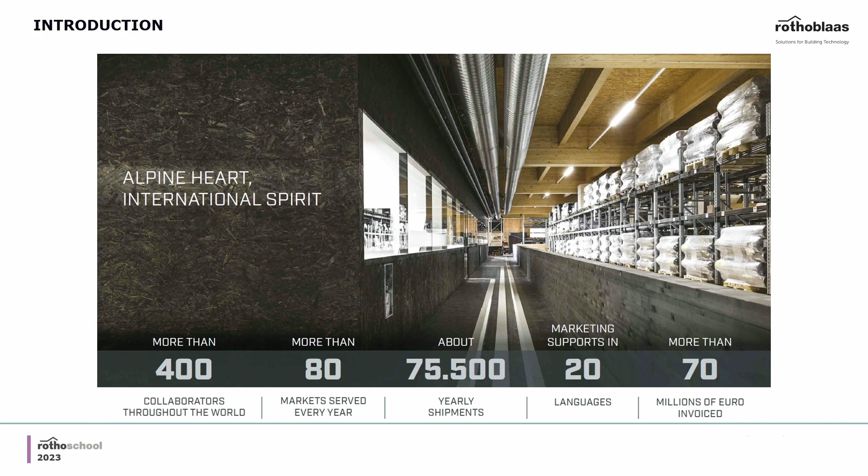This is why we have an alpine heart but an international spirit, because we are located right in the middle of the Dolomites, but we are as well present and located all over the world with our subsidiaries. We are more than 400 workers in Rothoblaas at the moment. Actually, we are almost 500 as we speak, because we keep on growing and growing.

As you can see here, but we're going to discuss more in detail also in the video lessons, this particular mass timber structure here, we just recently finished the construction of this massive and very nice automatic mass timber warehouse that we have here in our headquarters of Rothoblaas. And this has already doubled the existing warehouse space that we have in Rothoblaas.

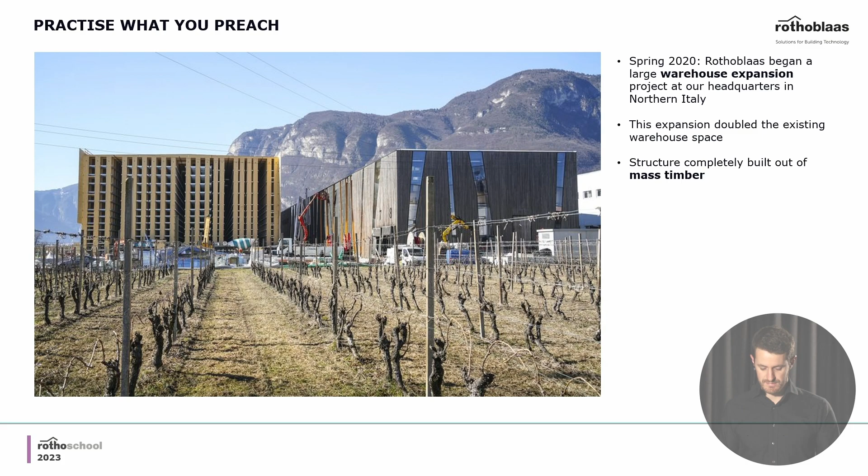So for us, it's practice what you preach. We preach with our Rotho schools around the world to use timber, and also for our own project, we use timber. The use of wood and of timber structure, of course, for us is very important from, as you all know, a sustainability point of view, very, very important. And this is why we preach also the use of this kind of structural material.

But of course, as you all know, timber is a material that a lot of people are passionate about, and myself, I'm the first one to be passionate about it. And second of all, it has a lot of very, very good structural characteristics that we'll see throughout the video lessons. And this is why a lot of people love timber, not only because of its beauty, but also because of sustainability and great performance, really.

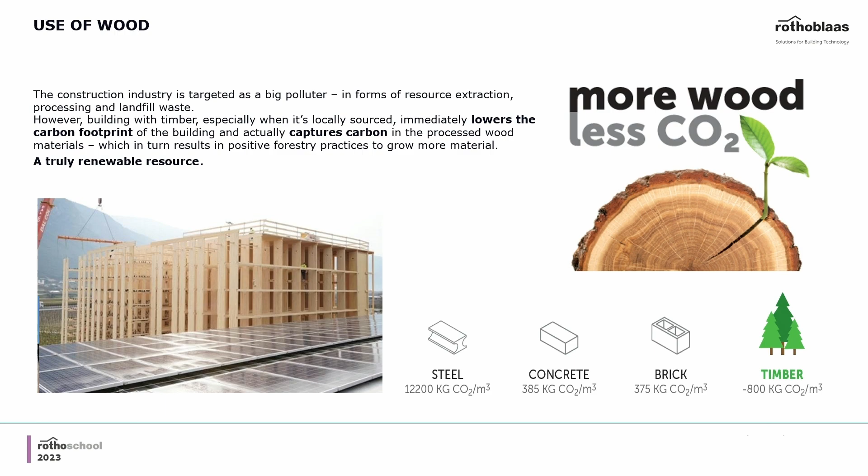What are these video lessons that we're going to do this year? There are 9 of them, actually. We start with the potential of CLT and mass timber.

Then we'll go for durability of timber structure and corrosion resistance for outdoor solutions, waterproofing and airtightness of timber structures, the acoustic in timber constructions, the fire design in timber structures, the seismic design, the composite structure or hybrid structure, a very hot topic nowadays to optimize the use of timber, the innovative connections for timber structures, and last but not least, the installation of fall arrest system.

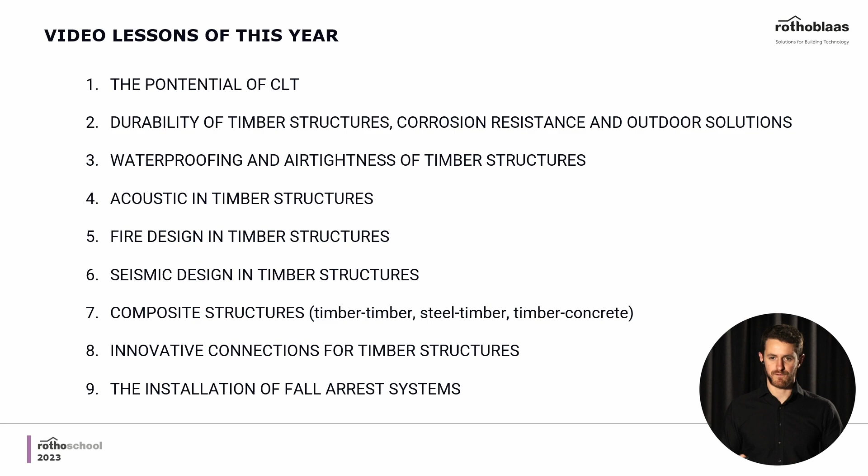Hello everybody, in the lesson of today we are going to have a look at the fire resistance of the timber structure, as you can see here. So a lot of people, as you can see in the image, have the fear that timber and wood in general is a combustible material, and therefore the resistance in the fire case is not going to be good. Actually, as we will see in the presentation of today, it's exactly the other way around.

But why are people so scared about the fire case?

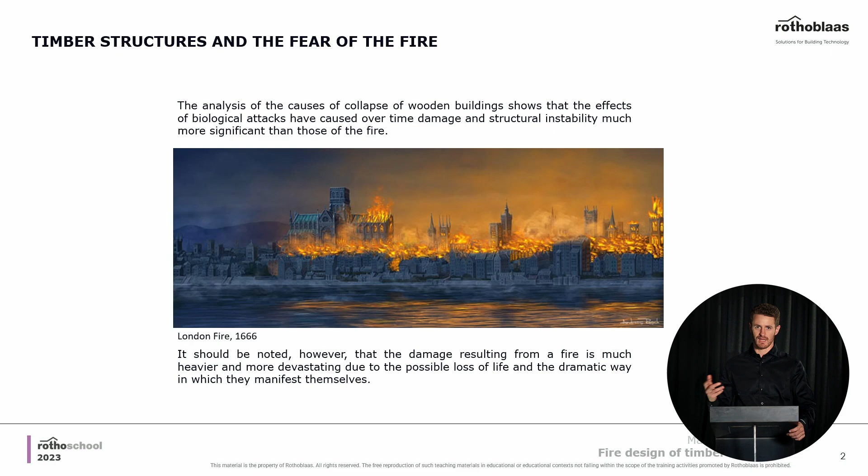As you can see in the image, the effects of fire on cities and buildings in general are devastating, and this is why these images are stuck in people's minds. What we are trying to do with this lesson is explain why it is actually the other way around. I've made this graph for you to more deeply understand the phenomenon.

Here you can see that the main causes of issues in timber buildings are design issues, for instance, when the timber building is not designed in the proper way. This is why we teach this at the school, because it's very important to build correctly with timber structures. It's strictly connected with design issues, also durability issues, since timber has to be designed properly so it remains durable throughout the years. Connections are also very important to design correctly, because they are the most fragile part of the timber structure if not designed properly.

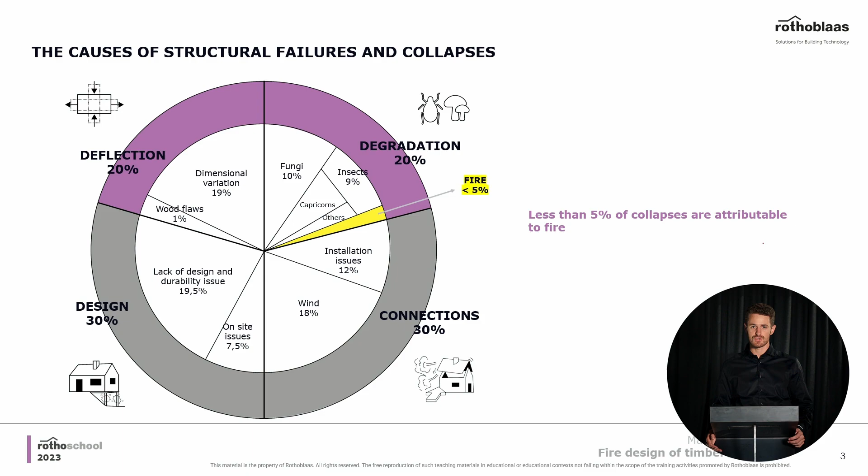Therefore, you can see that only 5% of the overall issues are caused by fire. So we shouldn't be so worried about fire in timber structures. Actually, sometimes it's more of an issue with another type of structure, for example steel, just to give you an example.

So you can see here what happens when a timber structure catches fire and the fire is then extinguished. You can see that the connection is partially exposed, but the timber structure is still standing, so it hasn't collapsed. This means, first of all, that we have a lot of safety factors in our design, which we'll see throughout today's short lesson. This also shows that the structure itself has a lot of resistance to fire. Of course it has fully charred, it has burned completely, but this doesn't mean it has collapsed.

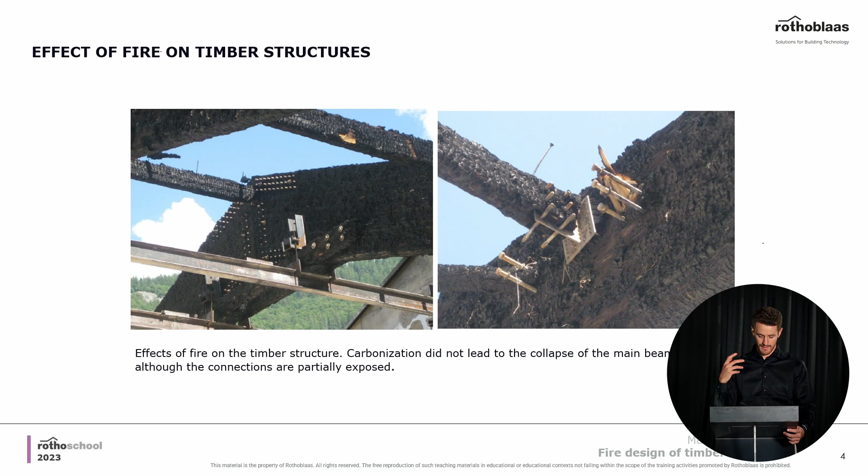What has collapsed, though, and it's very clear in this image, are all the secondary structures, for example the purlins in this case, or the timber boards finishing the roof. So one piece of advice is that it's very important to design the structure for the right fire resistance, but at the same time you should also be careful studying the secondary elements in your structure, so you don't risk them collapsing on the people inside the building.

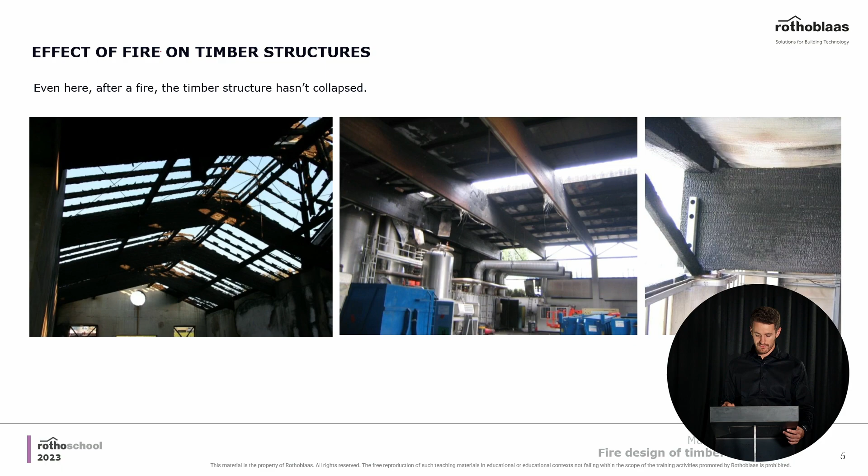Other pictures here of the main structure show that the primary beams, and also the secondary beams here, are still standing without any issues, although everything has completely burned. But again, keeping in mind the pictures we've just seen of the burnt structure, you've seen that it's all charred and the section of the timber beams is very much reduced. So why is it still standing?

This is the first question we could ask ourselves, and the first answer is right here in front of us. First of all, in the fire load case, we consider lighter weights, a different loading which is lighter than the one we consider for ultimate limit states. And why is that?

First of all, you can see one example is the snow case, the live load of the snow. Since we have a fire burning inside the building, the heat melts the snow, and therefore the snow is not there anymore. So in the real case scenario, we can consider a lighter load.

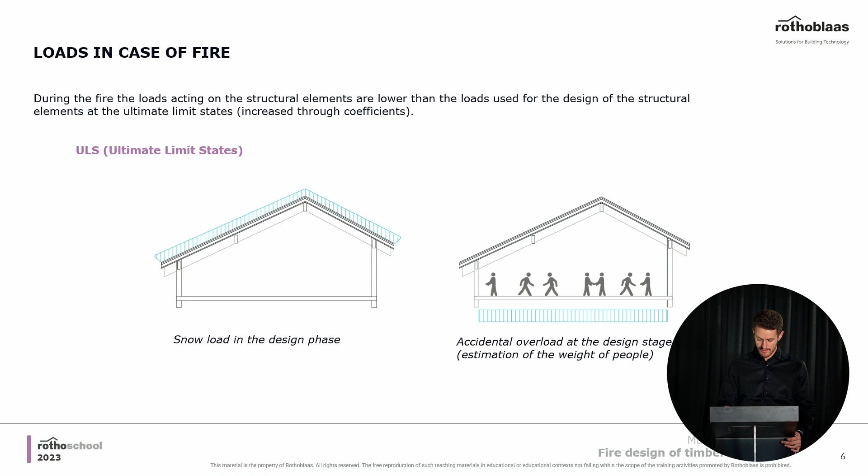Another thing to consider is that the live load itself, the people living inside the building, are evacuated, they escape during the fire. This means no people inside the building, so a lighter live load. You can see here what I've just explained: heat and people escaping. So even from the real case scenario, it's easy to understand why the calculation is like that. It's much easier to understand how the calculation works if it has a clear connection with the physical, real case scenario.

But going back to the theory, what do we need in order to calculate the fire resistance of a timber building? In this case, Eurocode 5 about timber structures comes in very handy, as does the Eurocode about fire design.

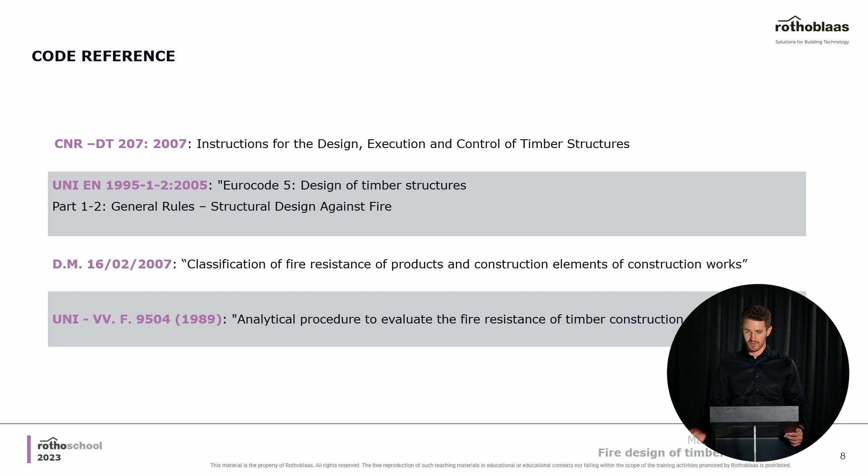So these two Eurocodes are the main references for fire calculations. But before going into the calculation and the formulas themselves, it's important to understand the physical phenomenon of combustion. So when is combustion happening? When three things are present at the same time. It's easy to explain with the combustion triangle, which you can see in the slide here.

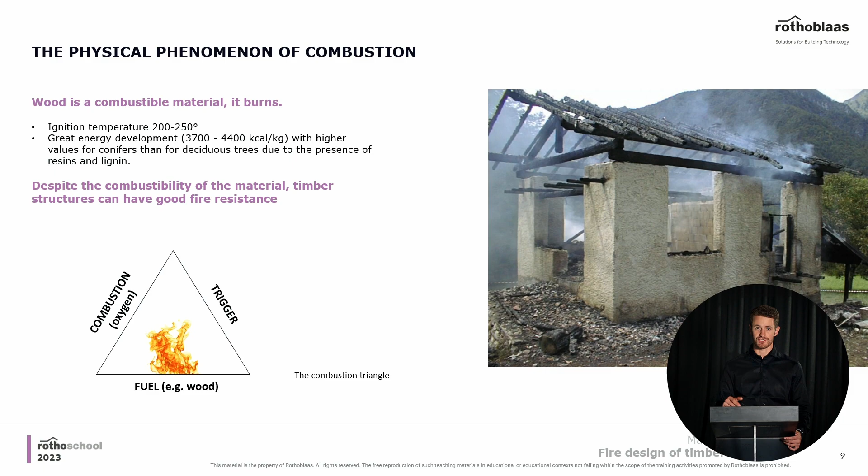So, of course, you need oxygen. You need a trigger, which is an initial flame that triggers the whole fire. And then you need fuel. Fuel can be anything - it can be the timber or combustible elements inside of the structure itself. The ignition temperature of timber is about 200-250 degrees, and the energy and heat that comes out of the combustion is, of course, very big.

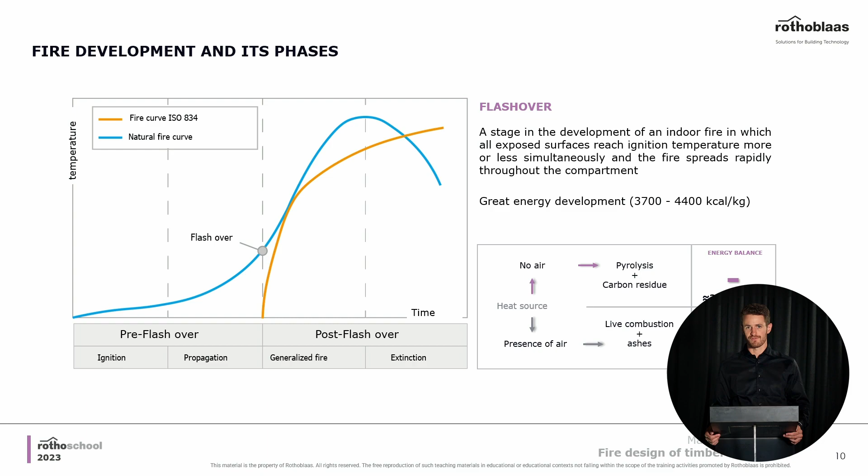But one case is the physical one, another is what we consider for the calculation. In blue we have the natural curve of the fire case. Initially we have the ignition, then the curve is going up because we have the so-called general fire. If we only have to study the fire resistance of the timber structure, we don't really consider the ignition phase, since it has not so much heat involved. So we only consider the general fire.

So the general fire happens only after the so-called flashover. Flashover is the situation after which you have indeed the general fire.

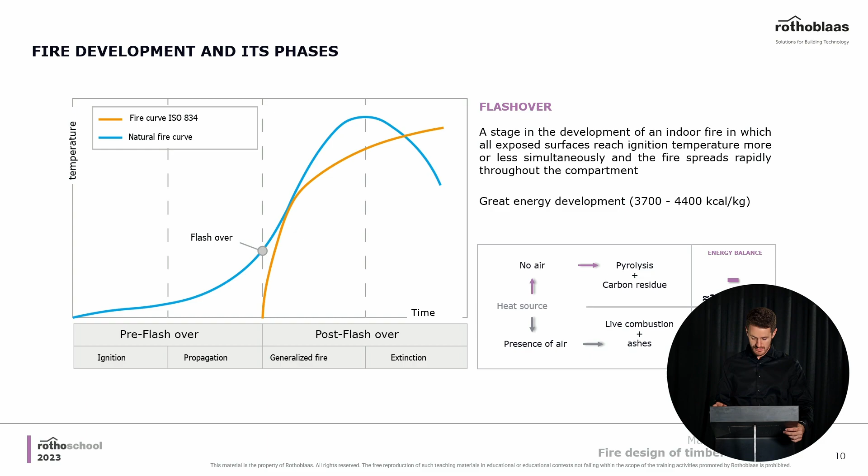What is the good characteristic of timber? We were saying before that it works better than other structural types and materials in a fire case, and this is the reason. The wood burns - that's obvious, everybody knows that. It's a combustible material, but it's a very good insulation material at the same time.

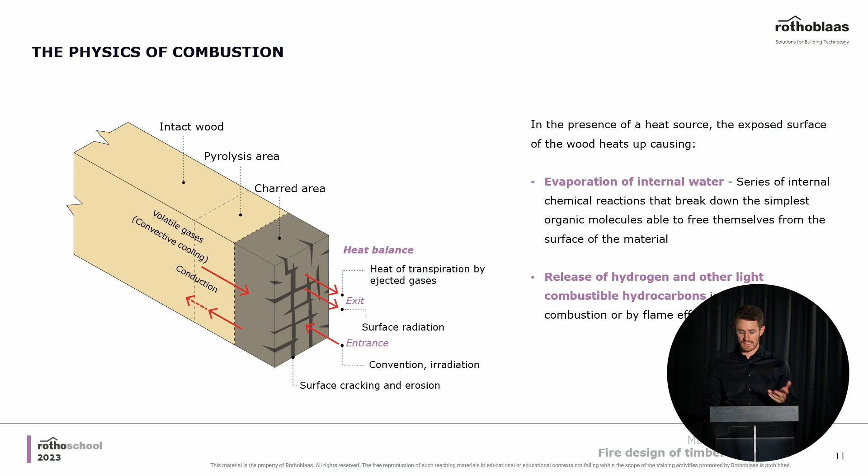If we see even better here, another section of the timber - the charred part of the wood is losing all of the water that is inside the wood itself, and therefore it cracks. So it's easy to understand that this part does not retain any structural properties.

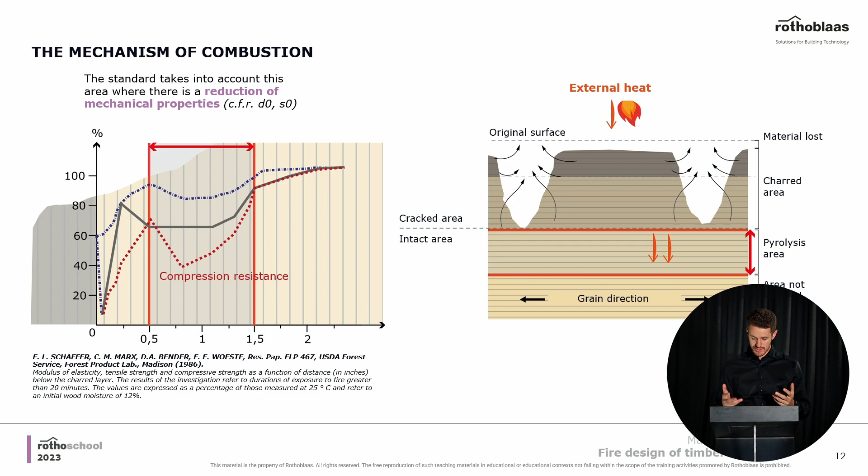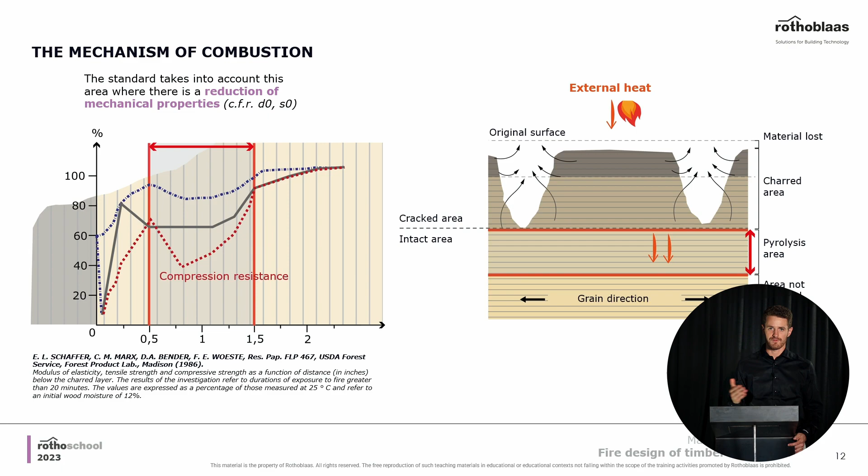But we have to add something else. Inside of the residual section we were discussing, we have a little layer - the pyrolysis area and something slightly further that has a higher temperature. Just in case, as engineers always do, to be on the safety side, we are not considering that part either in the calculation. So we take it out of the game when we calculate our net section. You will see exactly the same thing in the calculation that we'll analyze together throughout the presentation.

As you can see here in the spec in front of us, different types of wood have a different charring rate. So what are the characteristics most important for the charring rate, to understand how fast our wood species is burning? First of all, the density - because if you think about it, more density means there is more material to burn. So more material to burn means it takes a longer time.

So it means a slower charring rate. Of course, humidity slows down the combustion. But we have to add that for our timber structures, usually the humidity is controlled and is under, usually around 12%. So it doesn't really make such a lot of difference.

Then we have the wood species. If you have a different wood species, you would have a different density of the wood itself, so it's very similar to what we've stated before.

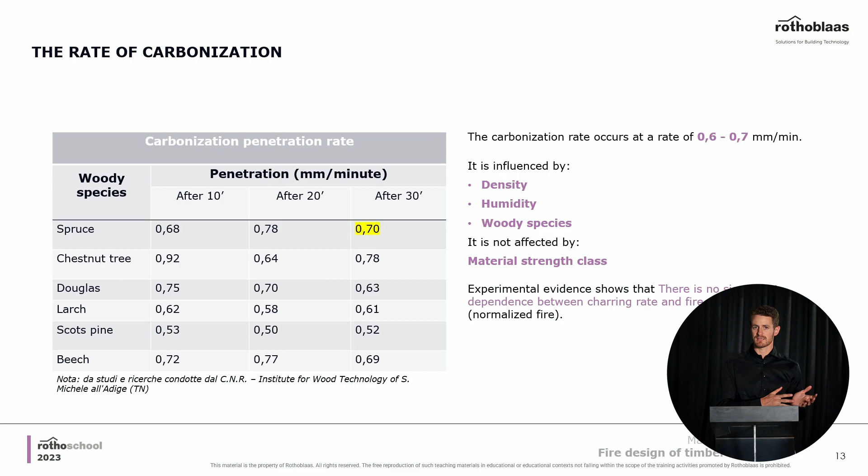What does not really change the charring rate at all is the material strength class. This is linked to structural timber, but it has nothing to do with the charring rate. It only helps the timber structure to have more resistance, but in the ultimate limit state.

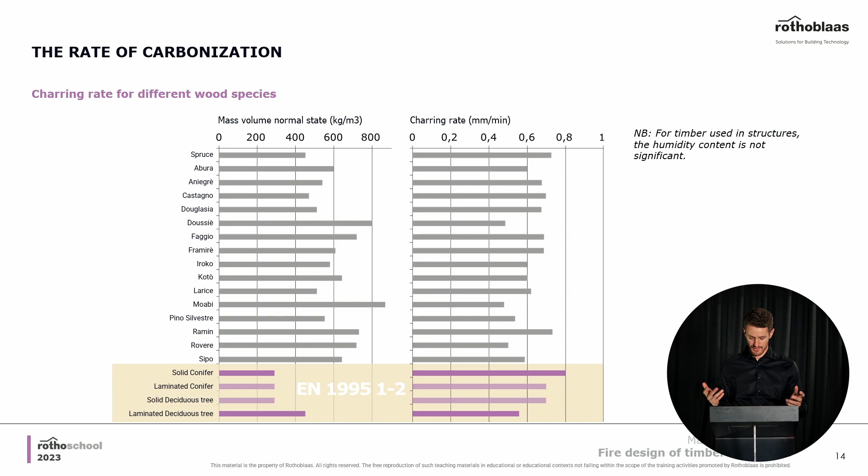So in fact, you can see from this little spec here that the wood species with a higher density also have a lower charring rate, so they burn in a slower way.

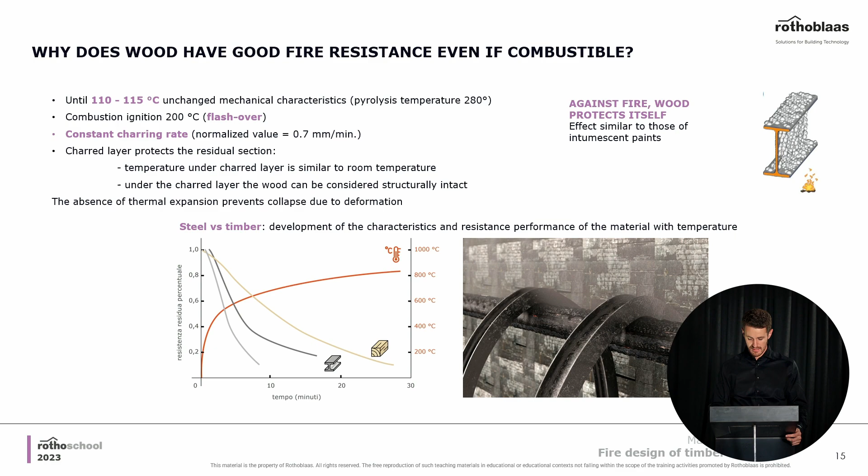That's very good. We said before that after 15 minutes, usually all the steel exposed to fire and not protected loses its structural characteristics roughly in that time. Here you can see a zoom in of what we were explaining previously.

Then we have the E, that stands for integrity. So, if you have a structural wall dividing one compartment from another, that wall has to retain its integrity in order not to have the fire spreading from one compartment to the other, and this is why it is so important.

As well, the insulation means that if we have a fire in one compartment, it's important not to have the heat trespassing into the other compartment either, because an extreme heat can cause fire to spread there too.

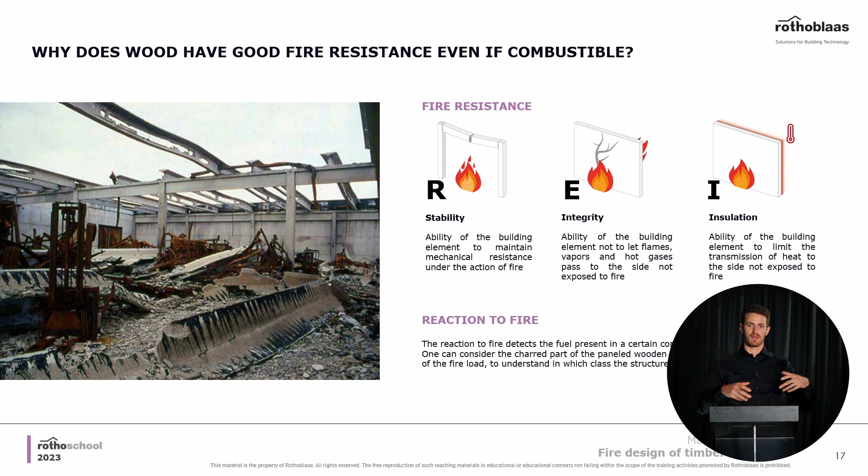So we don't only talk about fire resistance, but also fire reaction is very important, to sum up what we just said. We will see what materials have a better fire reaction than others, roughly at the end of the presentation.

But now I would like to analyze with you a little more in detail how the calculation for the fire case works with the timber structure.

In particular, here we have our timber section, and we are trying to calculate the residual effective section that is left after the fire case. That section is used to calculate the residual resistance that our timber beam, for example, has after an exposure to fire that can be 30 minutes, 60 minutes, an hour and a half, and so on.

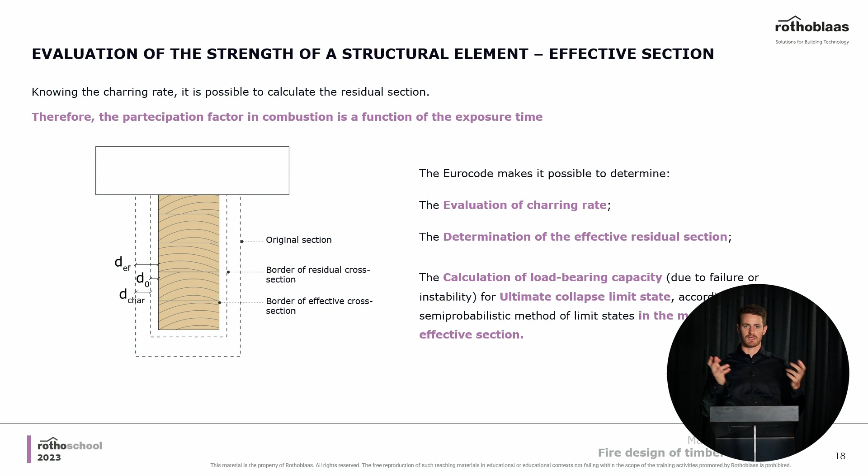So, of course, the Eurocode comes very handy in this case, and there are differences that we have to analyze together.

So there is one-dimensional charring rate, which is easier to calculate because in the case of wood, the one dimension is easy to consider. Here, d char 0 is the dimension that chars after a set amount of time. It's a simple calculation: beta 0 multiplied by t. T is the time of exposure, and beta 0 is the one-dimensional charring rate.

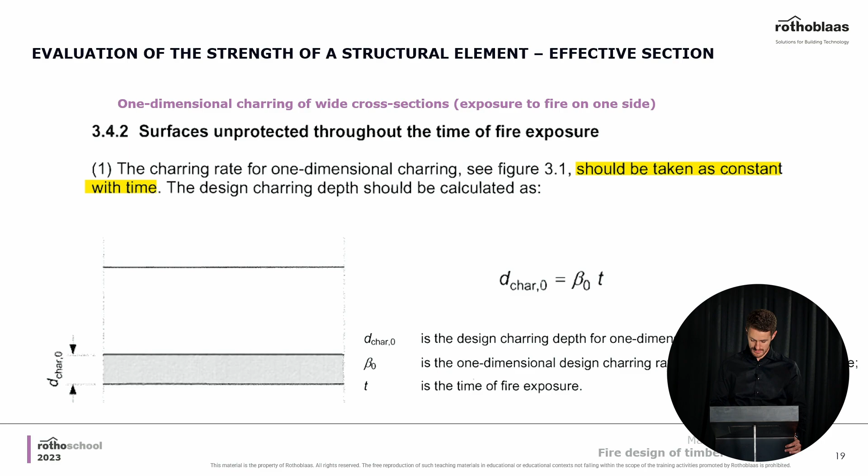You see that if we consider also the corners, it's easy to understand, because the physical idea is quite clear in your mind. If you think about a corner, it is attacked from fire from two different angles, and in that case, it's easy to understand why it's burning in a faster way.

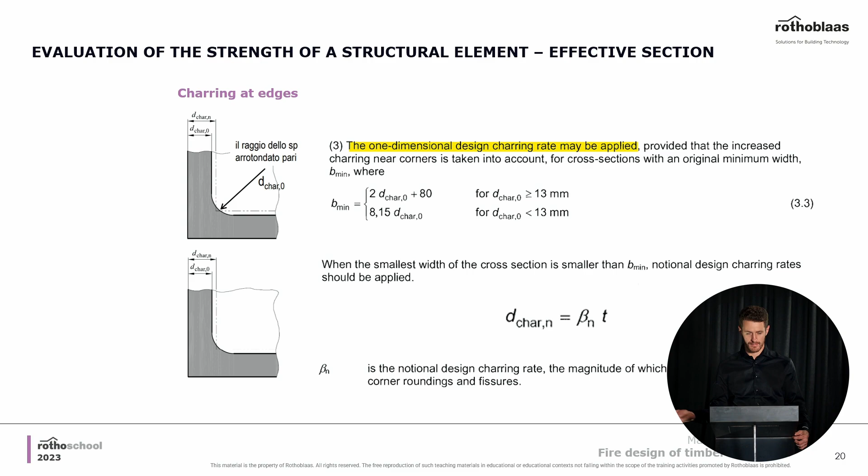So it's easy to understand why the charring rate in two dimensions, where a corner is, is higher than the one-dimensional charring rate that we analyzed before. In fact, it's exactly the same formula, but in this case we consider beta n in the formula, multiplied by the time of exposure. So we'll see now what is the difference between this beta 0 and beta n.

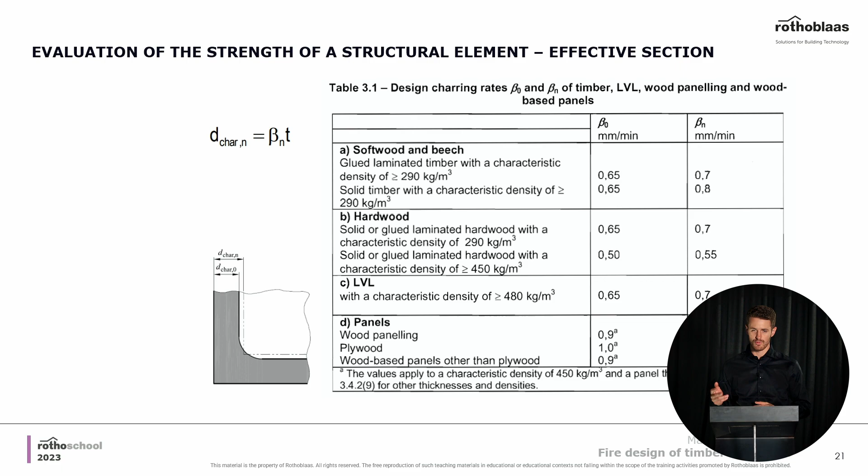You see that beta n is a higher value. In fact, to consider the higher charring rate in the two-dimensional case, we consider in general a higher rate in millimeters per minute. So for instance, for hardwood, the beta n that we consider is 0.7 millimeters per minute.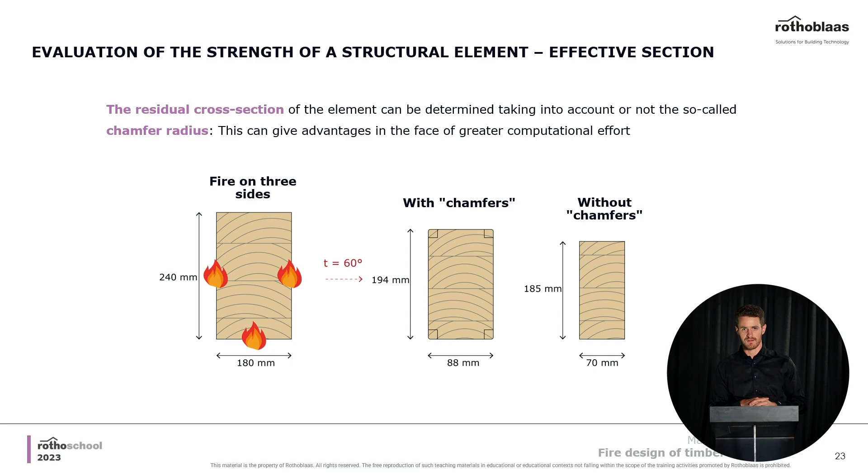Another thing that is often used by engineers — we said before, engineers tend to simplify things and be on the safety side all the time — one way to simplify the whole calculation is not even considering the chamfer where your corners are. Instead, you just consider a smaller section that fits within your section with chamfers, considering only the square corners, which is way easier to calculate.

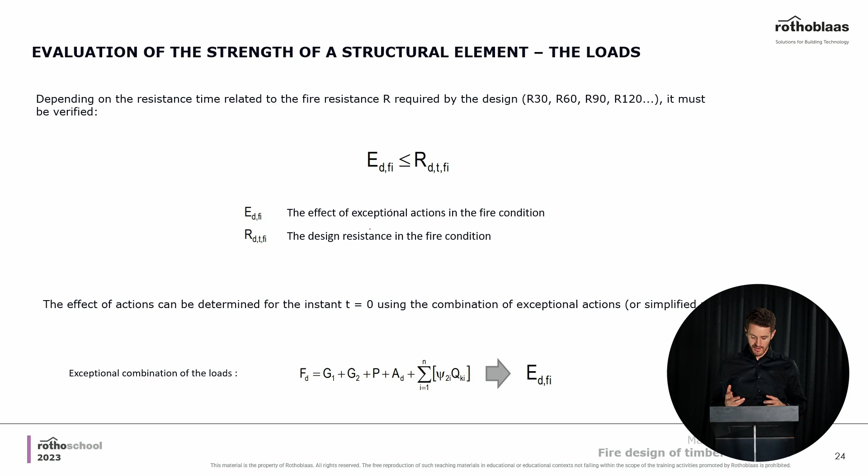What is the final verification we have to do? As always, we need to calculate that the resistance of the section we have is higher than the loads on the same section. That's easy to understand. As we said before, to calculate the loads on a beam, you should consider the exceptional combination of loads — the one for fire in particular, which I've reported here in the slide.

The other thing is the calculation of the resistance. In this case it's easy because you should consider a k mod equal to 1. Again, your gamma m in the fire case is also equal to 1. So it's a very simple formula, the one you see here on the screen.

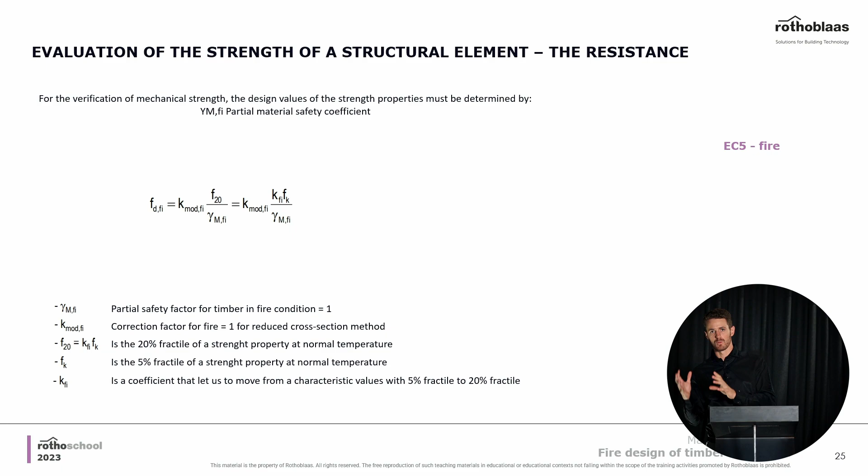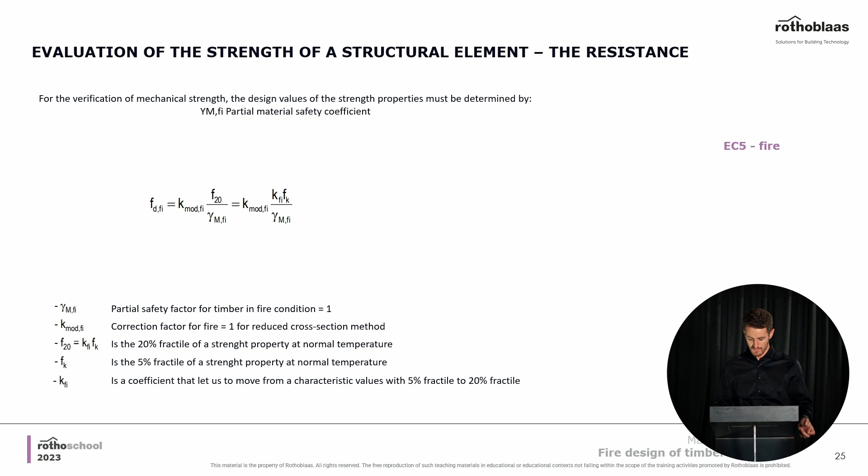You see that you consider a higher characteristic resistance of the timber section itself. Explaining this in simpler words, it's as if your timber structure has a higher resistance in the fire case. So not only are the loads we consider lower, but the resistance we consider for wood is also considered higher than in the ultimate limit states, according to Eurocode 5. This helps the fire design of our timber and wood buildings.

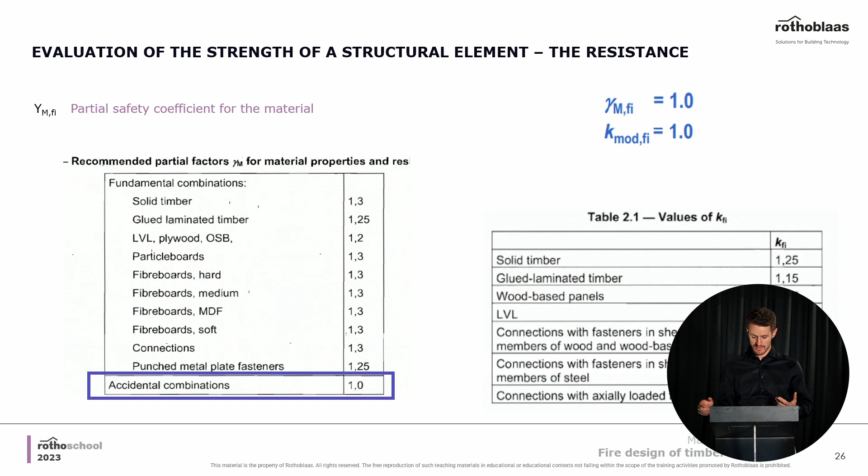You see here what we've just explained — the characteristic resistance is multiplied by this K fire, and this K fire is always higher than 1, meaning it enhances the resistance in the fire case. Sometimes it's 1.25; in connection with fasteners, for example in shear, only 1.05, but still always higher than 1. This is mostly referred to engineers.

But I'd like to explain it to all of you, because the formulas used for fire calculations are quite easy to understand for everybody with a little general knowledge of math, really.

So you see here, to calculate the layer and the part of the section which has completely charred and should not be considered in order to get the net, effective section for your calculation, you have to take away your dchar n — the part of the wood that has charred in that particular time, which you have to calculate for.

Then you also have to add d0 multiplied by k0. K0 is equal to 1, so d0 is only 7 millimeters. So again, in simpler words, to calculate the net section, you take away the charred part, plus those 7 millimeters, which is the part with a higher uncertainty — we're not sure that part retains 100% of its structural properties.

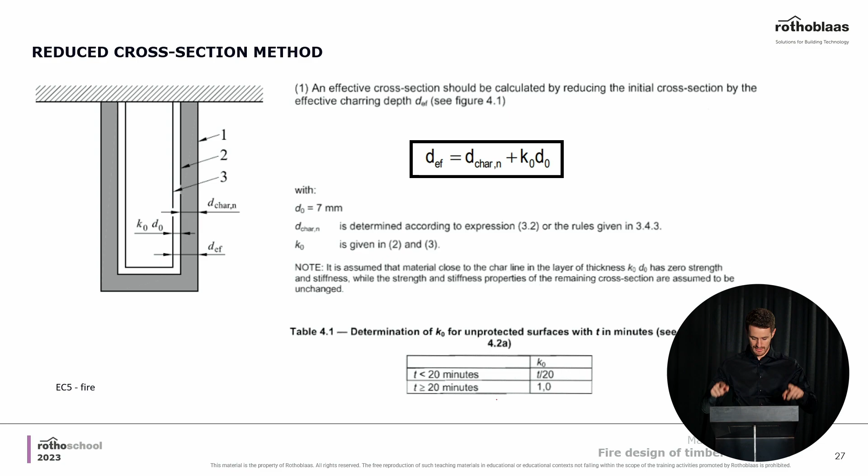So just to be on the safety side, you take it out as well, and you're only left with the effective section on the inside, basically.

Again, we said it already, density is one of the key factors, but we've explained now how to calculate the effective section. We said it also before in the first graph that we analyzed together, that one of the most difficult and hard things to do here are the connections.

So the connections, we should always design them paying a lot of attention, especially for the fire case, but also in general. You see here two examples of a connection on fire, between two timber structural elements.

We have on the left one connection which has exposed steel plates on a timber section. On the right, we have almost the same steel plates, which are though completely hidden inside of our timber section. It's easy to understand which one is working the best. It's always important to hide all of our steel parts inside of the timber so that the timber is protecting the steel from fire.

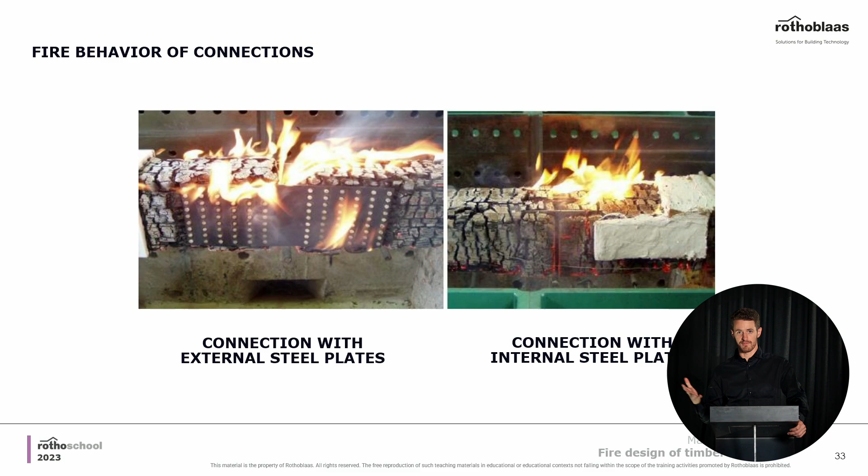It's easy now to understand why wood is working so well in the fire case, because we use the wood material to protect the steel from fire. So this really is a very good sum up of what I was meaning.

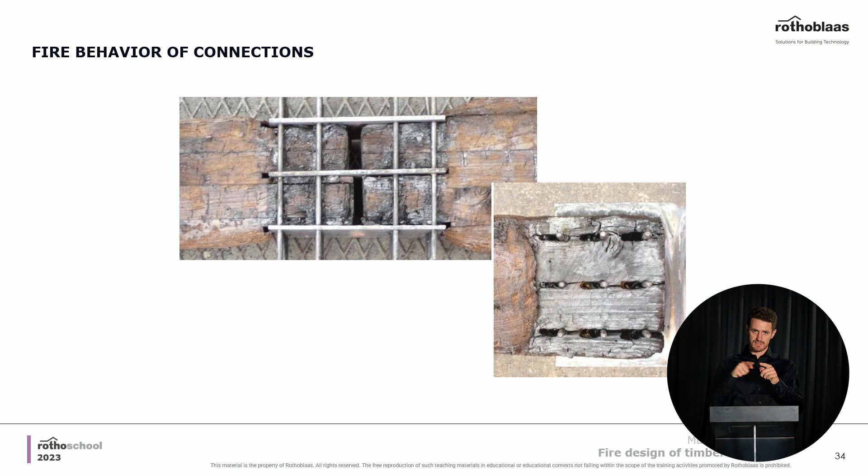Have a look at this image here. You see a partially unprotected connection, and have a look at the bearing of these steel dowels. Of course, the steel dowels heated up, and you see that the bearing is lower because if you heat up the dowels, you see what happens to the timber.

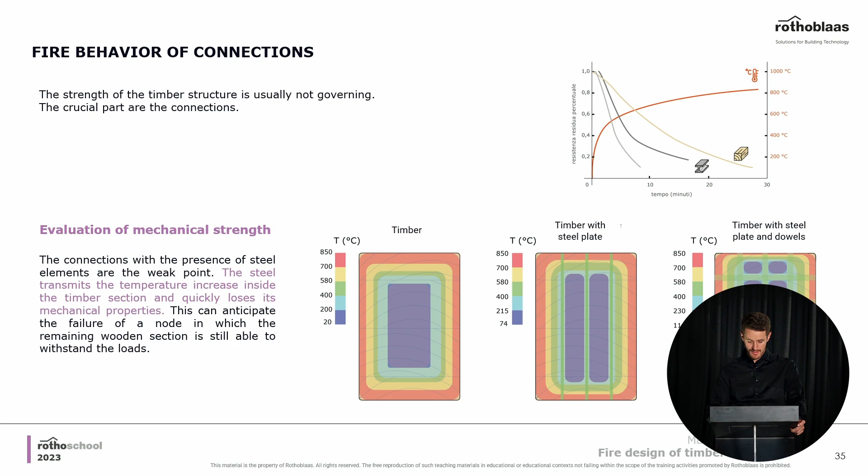Imagine what's happening when you have some steel plates inside of the timber. They bring the heat inside of the section, and heat is not making things better at all. So sometimes when you have a lot of steel plates inside of a timber section, it's good to do some further verifications, because it can change the easy formulas that we analyzed before.

One other important thing is the minimum distances. You all know that minimum distances in general are super important for designing timber, because even if you're not considering the fire case, it's important to consider the right minimum distance in order to avoid brittle failures. But also when you do the fire design of a building, it's important to consider the right minimum distances for fire, since we've understood that the timber is charring, so you're losing a part of it.

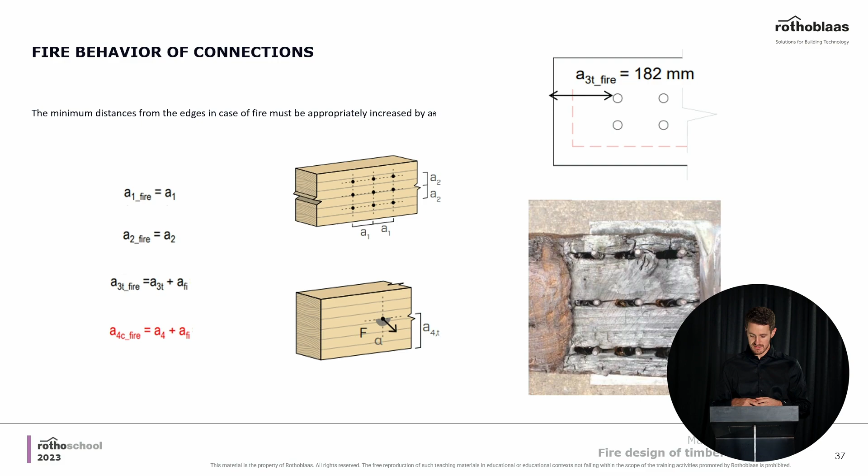In the particular case in which you have the dowels exposed, so they heat up and you see what happens in the image, it's important to increase the minimum distances from the edges so that you're safe even after the reduced section and the charring of our wood around it. We are still safe and we don't risk a brittle failure.

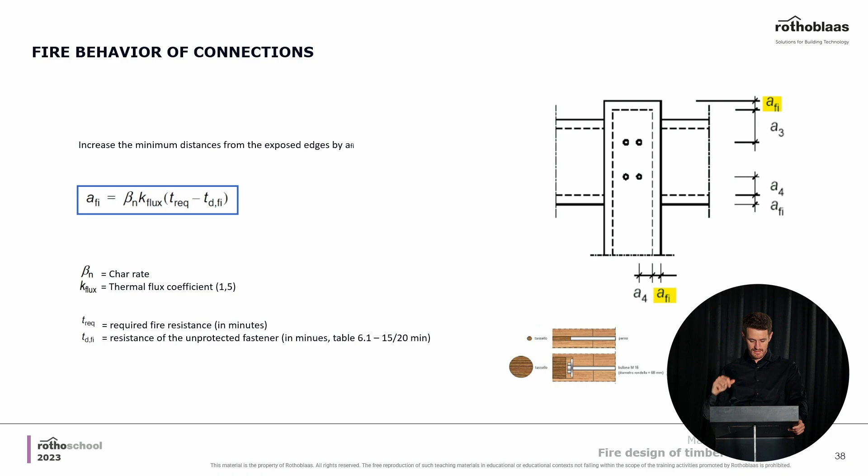And you see what I mean with enhancing the minimum distances. You have to add this A fire, so an extra dimension to your minimum distance.

Another thing that I strongly suggest is, again, protect your steel dowels, but also the plates, using timber, for example, timber dowels or timber panels, in order to hide the steel completely inside of the timber. This helps a lot to increase the resistance.

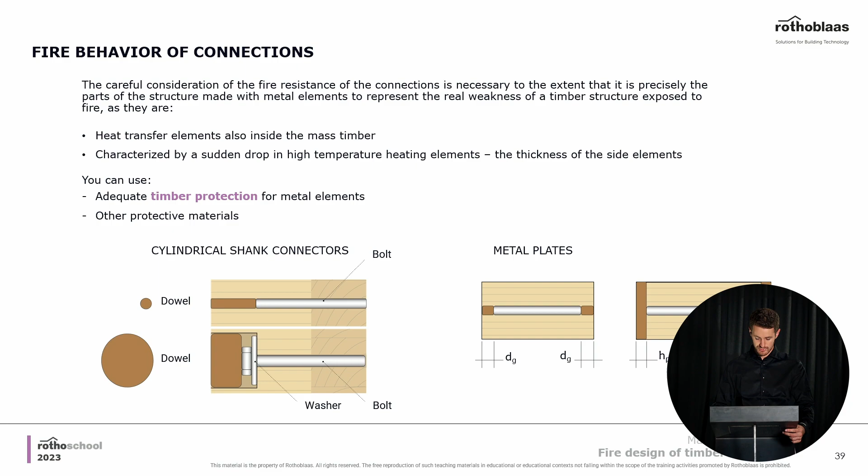As we were saying before, it's not only important to talk about fire resistance, it's also super important to consider the right fire reaction. And I connect to what we were explaining previously in this same presentation.

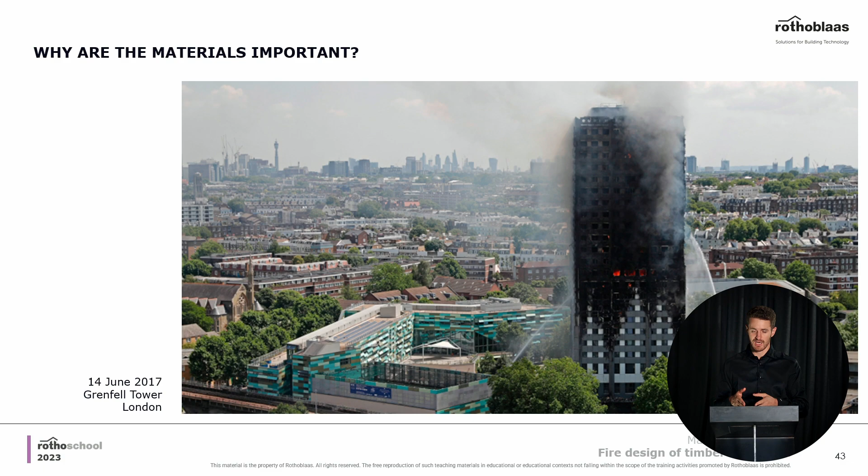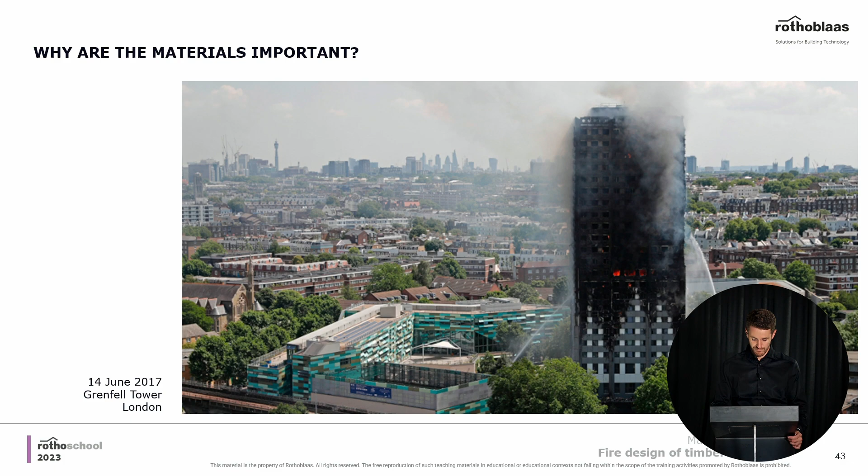So imagine what damage actually means. This means that 100 and more families are losing their own flat. So it's something that we have to avoid at all cost, really.

So let's analyze the issue more in detail here. You see what happens with a ventilated facade. Of course, the ventilated facade is very important for your building envelope in order to have cooler temperatures inside of the building.

But though it can be a highway for the flames to go up, and actually even to spread from one compartment on the lower floor to the upper compartment on the next floors, that means that the fire can spread very quickly.

One important thing you could do, for example, is placing some interruptions of this ventilated facade, still having the airflow that can go up in a continuous way. This at least helps to avoid these things.

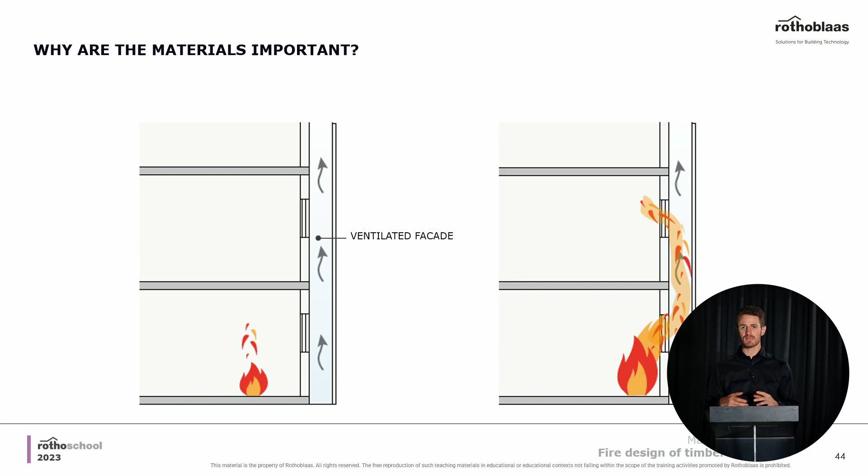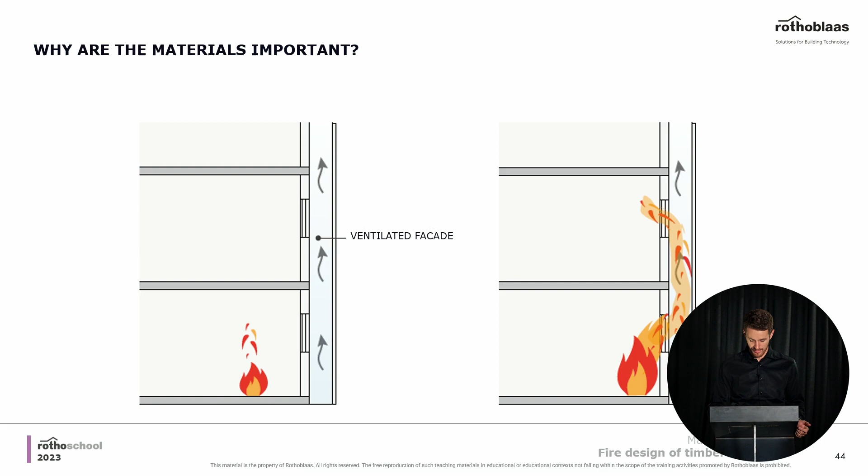Another thing that I strongly suggest to avoid the issue completely is using materials which are the right ones, with a good reaction to fire. You see a lot of smoke here, and a good reaction to fire means you're not producing a lot of smoke. Usually a good reaction to fire also means the materials are self-extinguishing and do not produce droplets of fire.

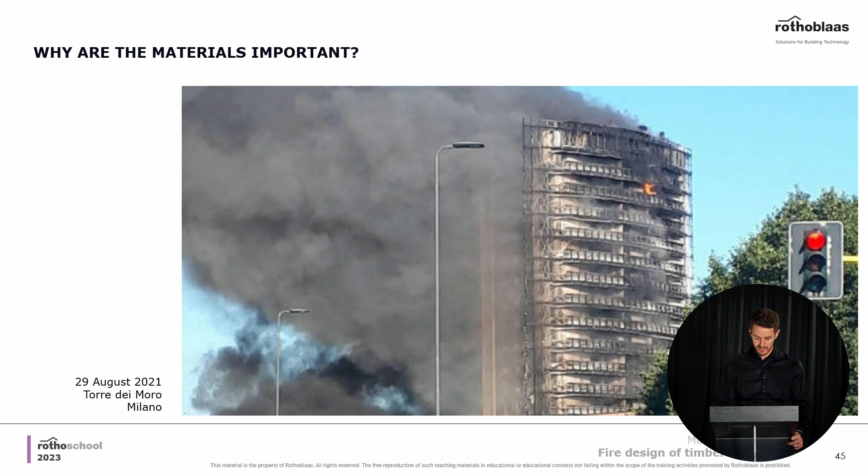This, by the way, is another tower, the one in Milano, Torre dei Moro, that we were explaining previously. So we've explained again what are all the characteristics that you have to keep in mind.

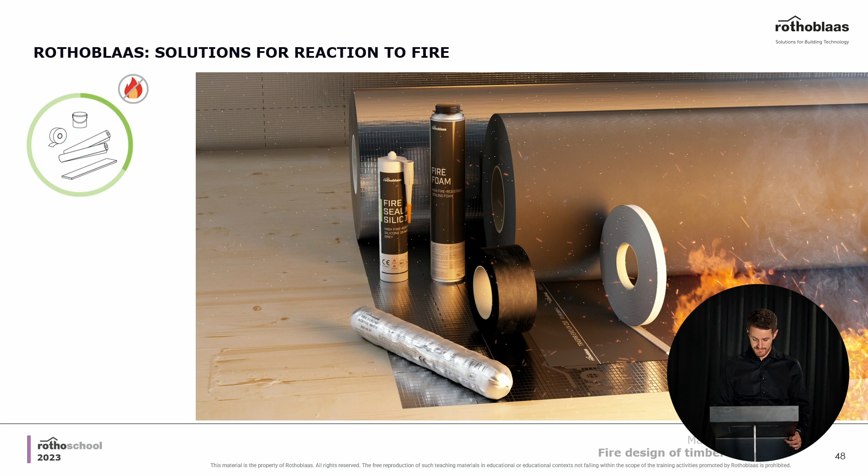Let's jump straight onto the solutions that you can use. For sure, Rothoblaas, we are lucky that we already have some solutions ready for you. The first one, for example, is using products which are not combustible at all.

You see the name of this product: A2S1D0. At the moment this maybe doesn't mean anything to you, but A2, these initial two letterings, means that the product is not combustible at all. Instead of being, in this case, a membrane that can catch on fire, we have an aluminium barrier, and the aluminium is not a combustible element. So in this case, it's an element that cannot burn at all.

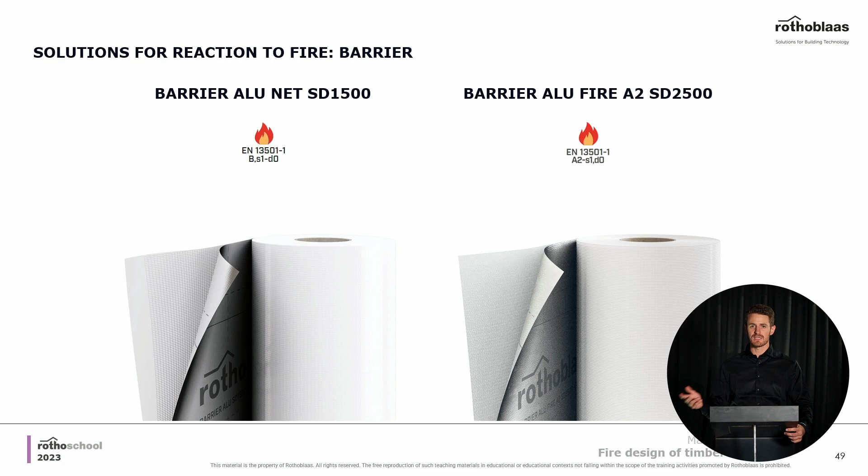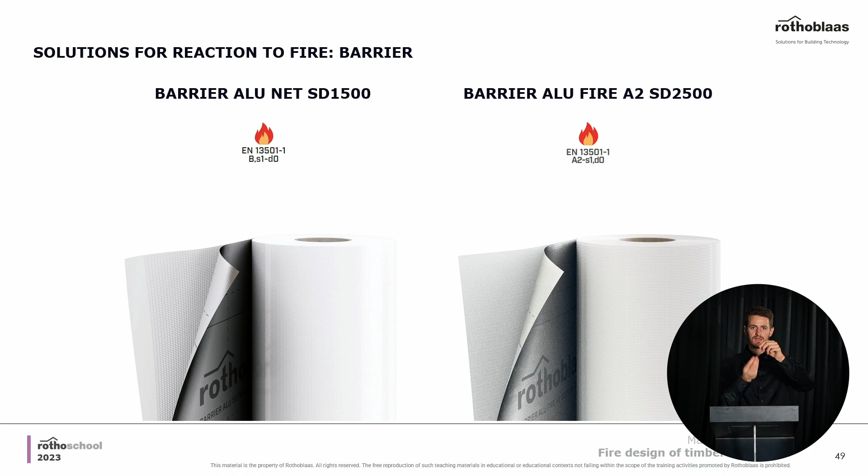What are the other two characteristics we have here? The next one is S1. S stands for smoke, meaning it's not producing so much smoke, which is again important, as you've seen before. D0 is just as important because D stands for droplets. You know what happens when you try to burn plastic - it produces droplets on fire. This is exactly what we have to try to avoid when designing a timber structure or a facade in any way, because droplets on fire can spread the fire much faster on the whole ventilated facade of our building.

So what other membranes can we use, for instance? We have the so-called EVO membranes. EVO stands for higher quality, and also for monolithic membranes - you've seen in a previous presentation the difference between microporous and monolithic membranes. In this case, the EVO products have a better reaction to fire. They are combustible, because you see there is a B, and the first letter is B, meaning it's combustible, but at the same time it's self-extinguishing. And you have an S1, so it produces just very little smoke, and of course no droplets.

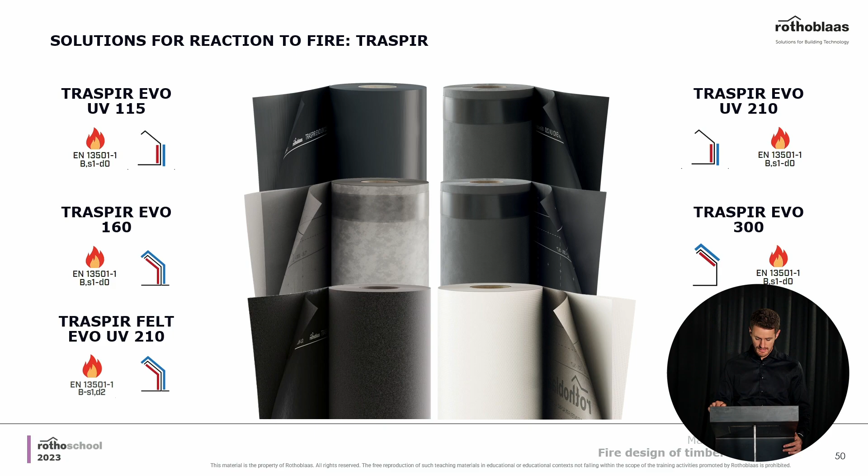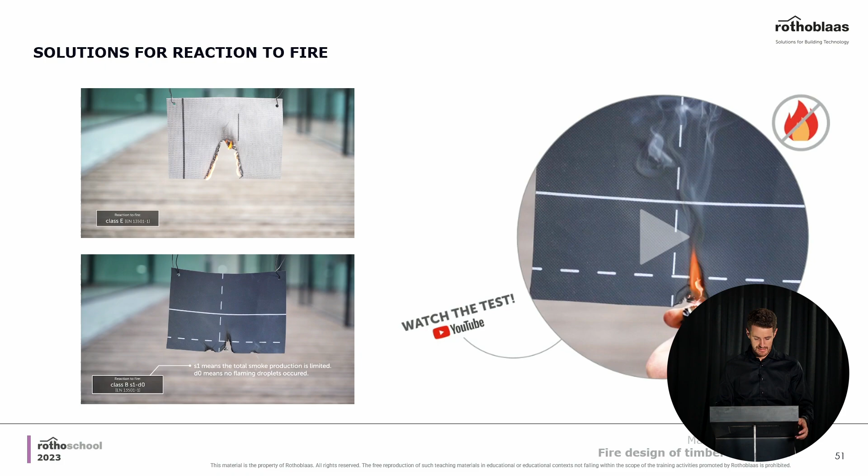Another thing you could do is go on YouTube and check out the videos I'm showing you right now. In the upper part you see a microporous membrane which is not designed for the fire case - you see droplets, you see smoke, you see that it's not self-extinguishing. In the bottom case, you see that the membrane initially catches fire, but then immediately self-extinguishes itself, so it does not burn. You can try it yourself - it's simple to try with two samples, a little test at your home.

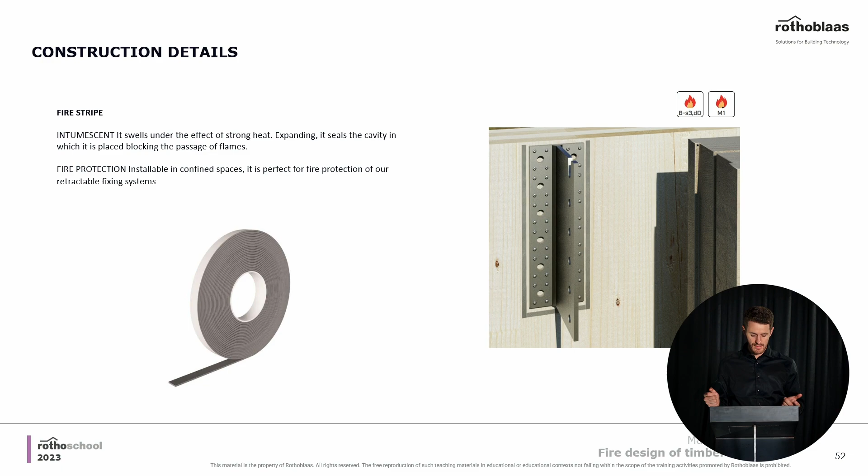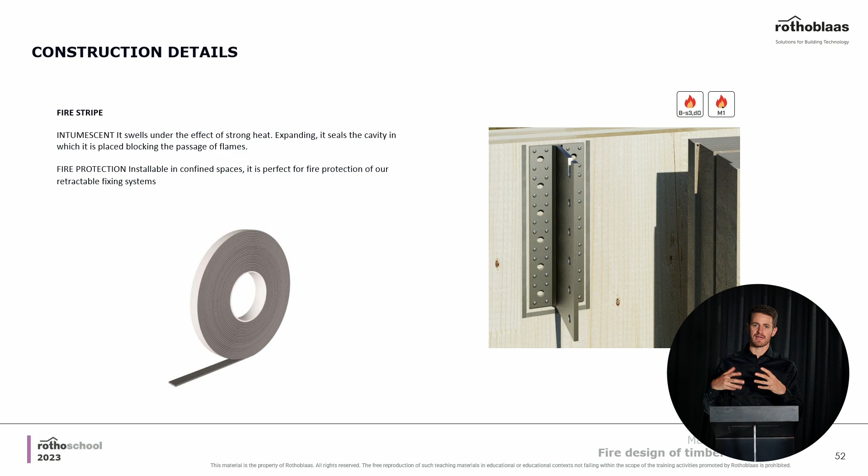So what do we use? The general name is an intumescent strip - a strip that increases its volume with heat, and by increasing its own volume, it protects and insulates more the inside of the connection. In this case, you could use the fire stripe, for instance, which is a physical strip that you put around the connection.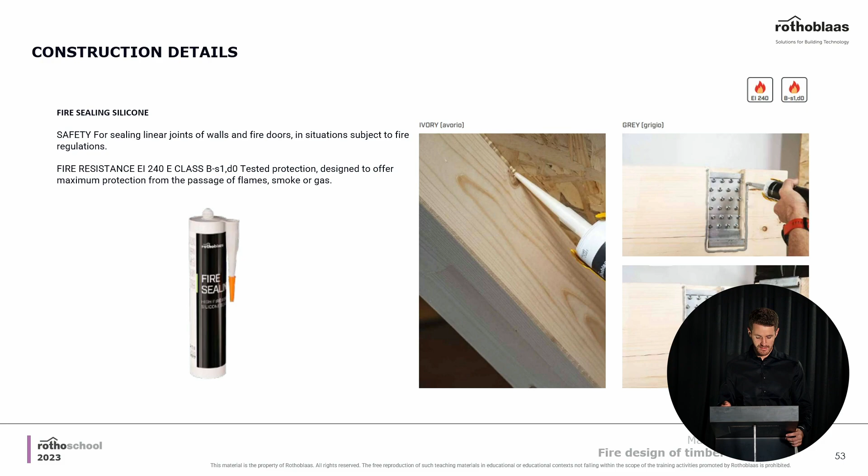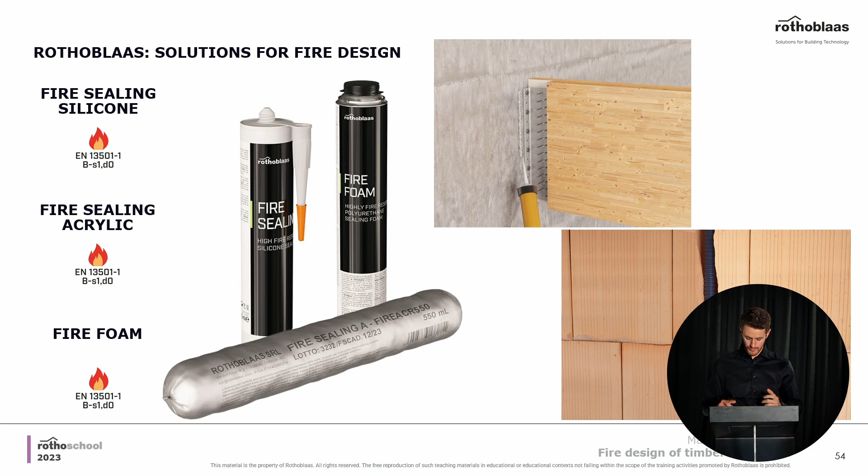Otherwise, you could use a fire sealing silicone, which has similar characteristics, but you put it down in a faster way. It's like silicone, of course, or even fire sealing acrylic. So different things to pretty much achieve the same solution.

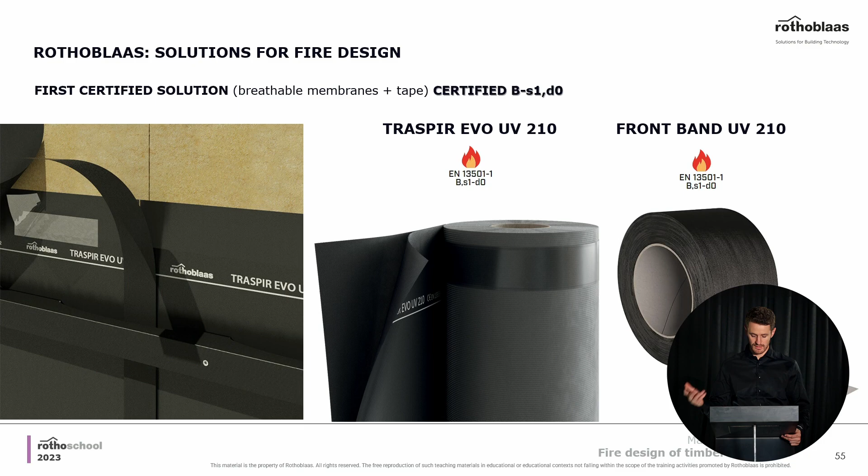We said before that in order to have a certified solution, also an EVO product like Traspir EVO UV 210, which is a membrane we have for ventilated facades and for walls in general, using also this particular tape, the front band UV 210, you can have a certified facade that works well for the fire case, having a characteristic that is B-s1,d0, just to connect to what we've explained before.

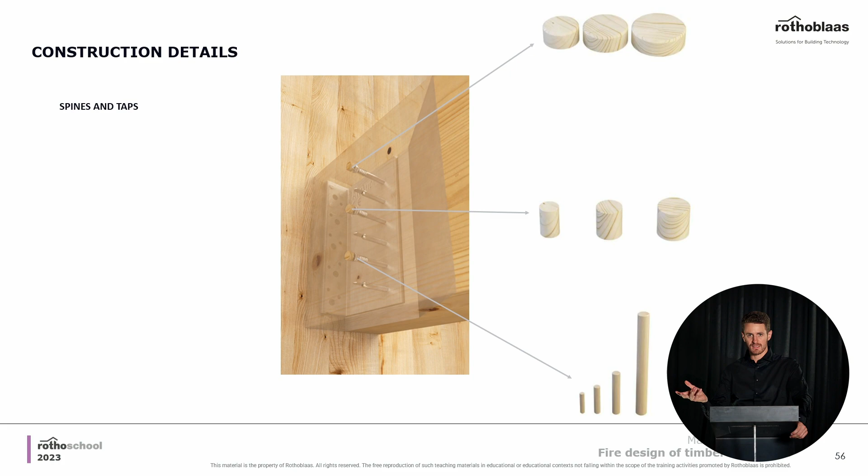Remember also two other products that you can use for the fire case are the taps, very easy things, but so important to protect your connection from the high temperatures of the fire case. By the way, they completely hide the connection itself as well, so you're sure the visual quality is better. This is good for architects, good for engineers, good for the fire case in general. One other important thing we'd like to explain, you know how important acoustics are for timber buildings and buildings in general.

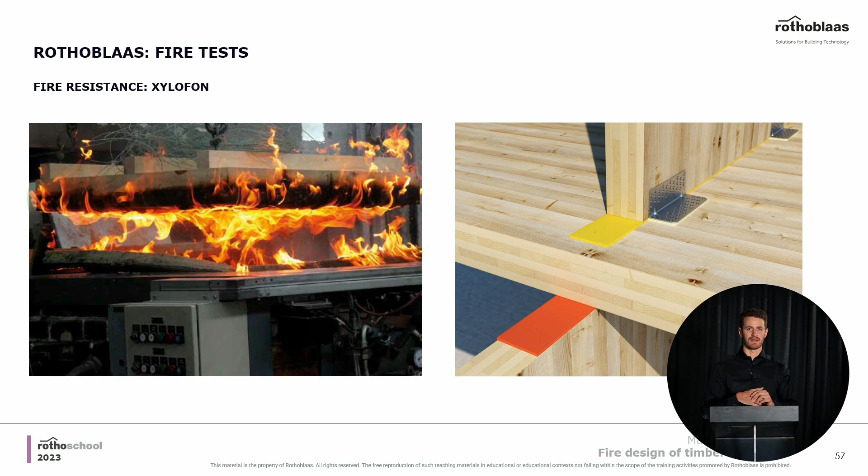Just to go a little bit more deep into the acoustic and fire aspect, you all know what a Xylofon strip is - that strip you place in between walls and floor structural elements to avoid the passage of vibrations and noise. In this case, we're lucky - actually, we studied it, it's not luck - this particular material has a very similar charring rate to that of timber, so you can use it also in the fire case with no issues.

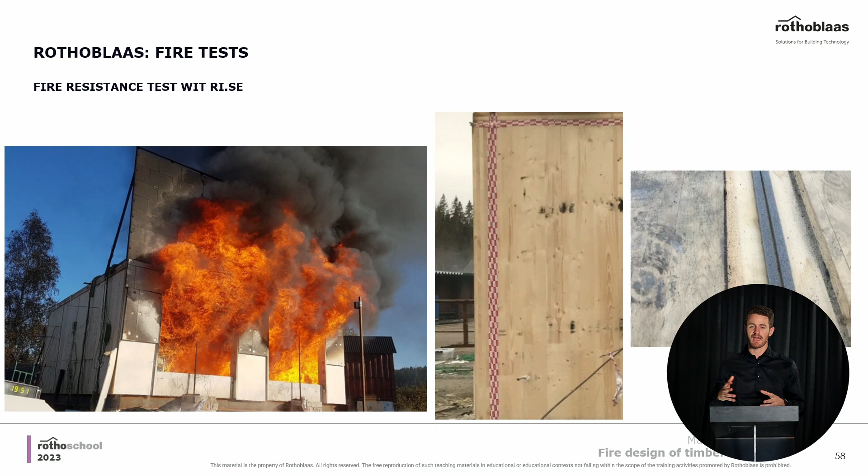We've done fire tests with RISE. In this case, you can see some images. And I would like to point out how important the details are in fire design. So the devil is indeed in the details, as I always say.

Continuing with the fire test, you see this little gap in between the floor and the CLT wall. First, we wanted to completely hide it and fix it, but after a little bit of thinking, we said let's actually keep going with the test with this little gap, as you would have on a real structure if you're not careful, and let's see what happens. This is the result we had - you see how the flame was capable of entering through that gap and expanding the fire outside of the compartment. This is why it's so important to use coking strips, as we were saying before, that with heat are expanding and are definitely a solution for these issues.

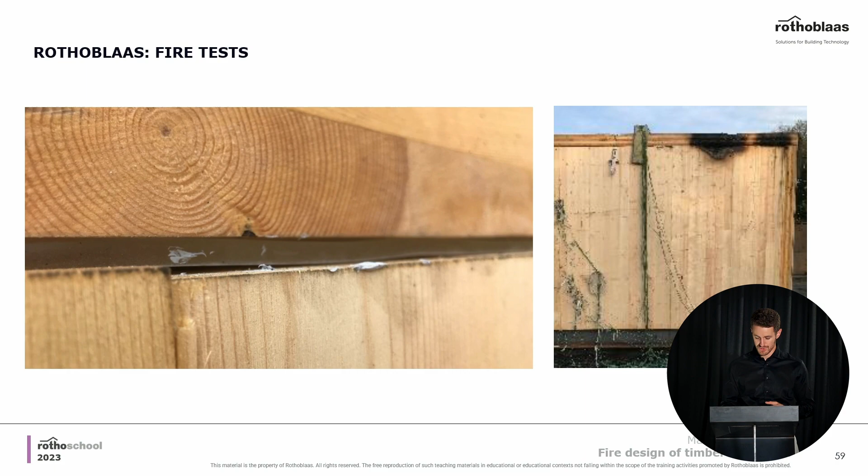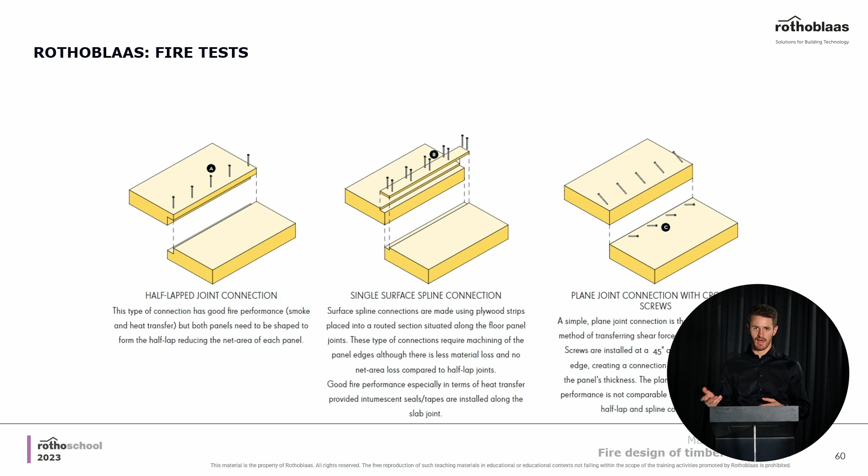So what do you have to do if you have a typical connection between a CLT panel and another? This is one typical connection you could have with CLT - a butt joint connection, half-lap joint connection, with a partially threaded screw fixing the whole thing. But the question here is what products could I use in order to avoid the passage of hot gases in general, high temperature, and the spreading of the flame as well.

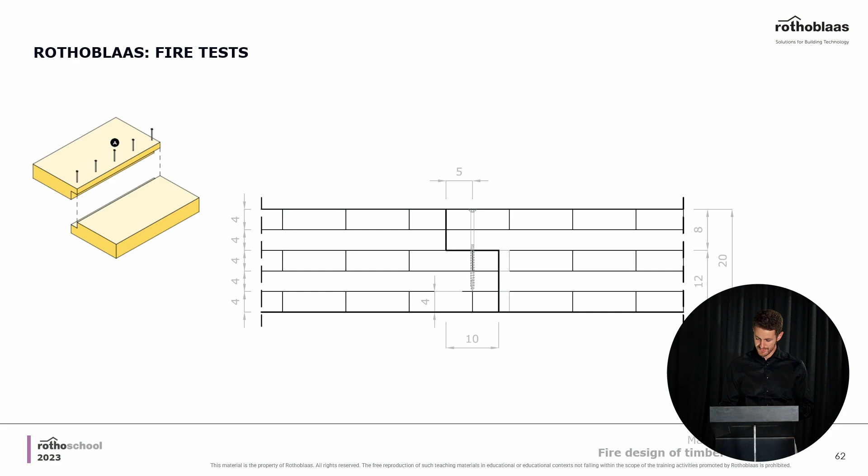So what do you use inside here? You're lucky that we have our solution. You always need to place, on the side where you could have the flame burning, a coking strip - for example, a fire sealing silicone or some of the other products we mentioned earlier. On the other side, you need a product for airtightness, because if you do the airtightness right on the other side, where it's not burning since you have your floor finishes and would never get to the tape, there is no suction of air. And if there's no suction of air, the hot gases stay in the compartment where the fire is and cannot spread the fire to other compartments.

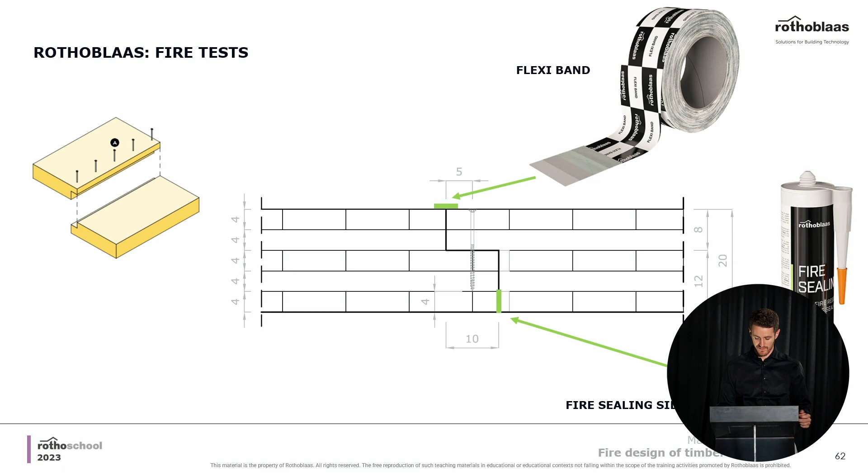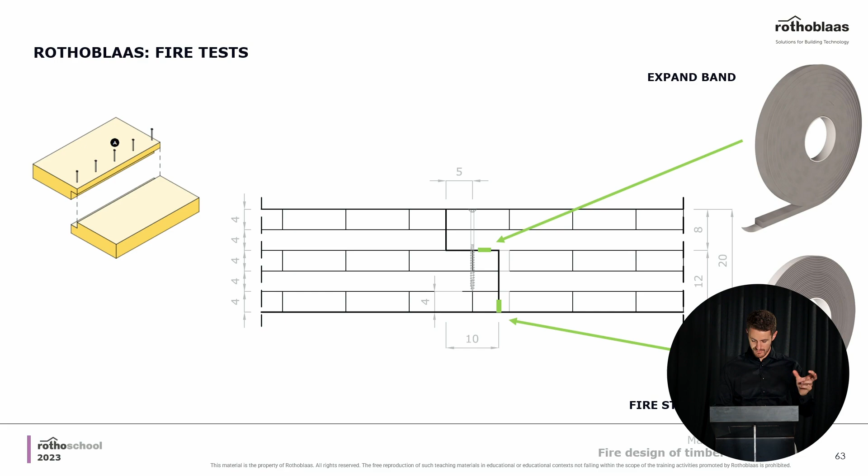You see here another solution, exactly the same concept - fire strip on the bottom part, and an expand band, which again is an expandable material, making sure you have the right air tightness of the building. So the same exact concept with different materials.